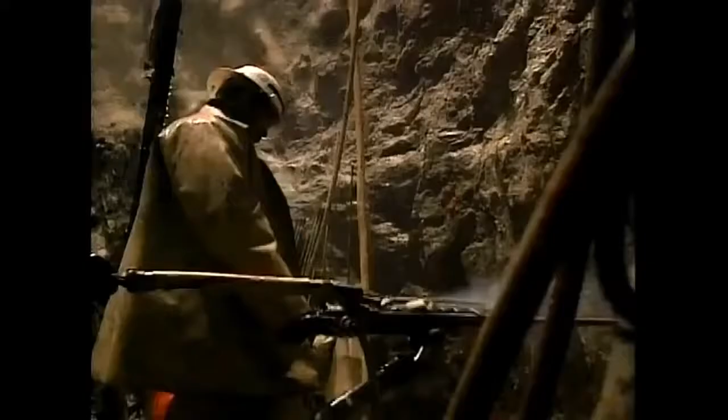To do this, miners will have to punch their way through some of the hardest rock on Earth. It will take the largest drilling machines on the planet, each more than 3 stories high and longer than 4 football fields, drilling 24 hours a day for 6 years to get the job done. The project is incredibly dangerous and outrageously expensive. The price tag: $7 billion.

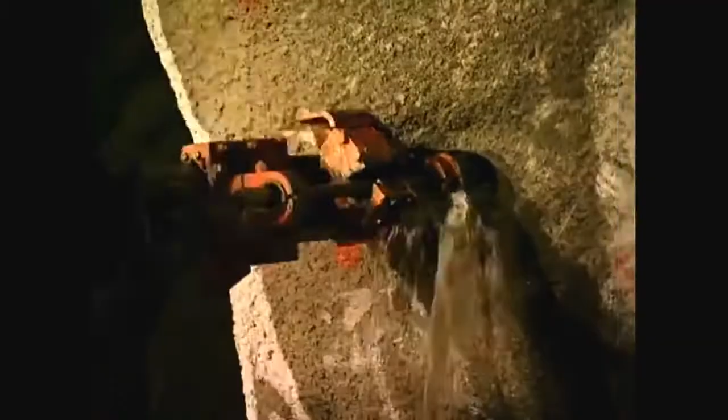Can it be done? Or will unforeseen problems bankrupt the project before it's finished? Will engineers be able to avoid the horrible fate of so many other tunnels? Fire, disaster, and death.

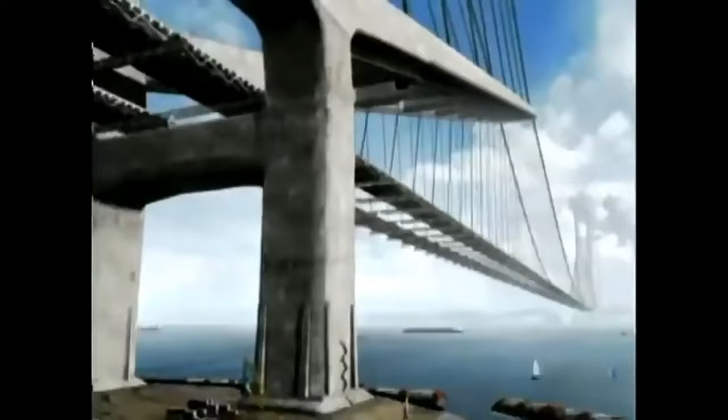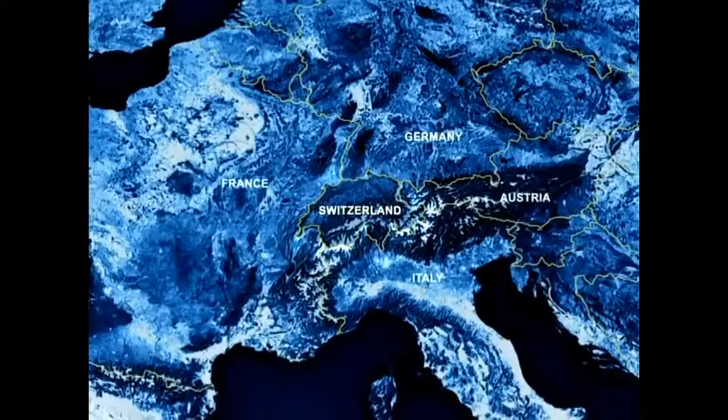To the outside world, Switzerland is a picture postcard. But the reality is not so pretty. Because of Switzerland's central location, each year 14 million trucks and cars coming from every corner of Europe pass through Switzerland on their way elsewhere. The sheer volume is fast turning this country into the biggest traffic jam in the world.

An obvious solution: put more freight and passengers onto trains to reduce the number of trucks and cars on the road. But it isn't that simple. The antiquated railway system is already jammed to capacity.

In 1998, Swiss voters decided that something had to be done. So they voted to authorize a whopping $21 billion for a mammoth project: a high-speed rail network to be built under the Alps, connecting Switzerland to the major cities of Europe.

The scale of the proposed project was staggering. It would require 2 separate tunnels, each one far longer than any mountain tunnel ever built. The shorter of the tunnels, named Lötschberg, would run for 21 miles under the mountains in southwest Switzerland. 50 miles to the east, an even longer tunnel would run 35 miles through the Alps. Since it would run directly under a mountain range named Gotthard, it would be called the Gotthard Tunnel.

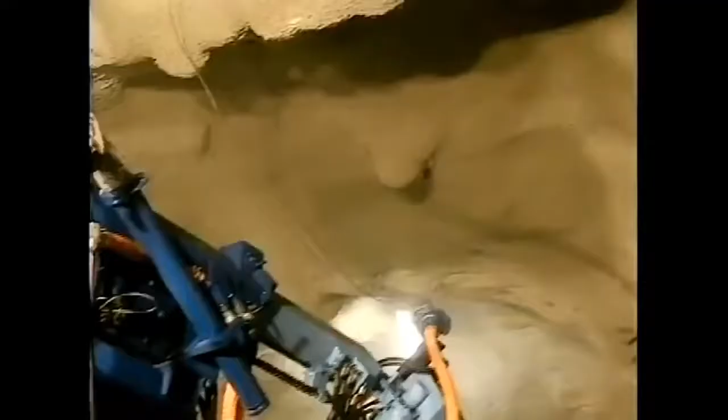So the contract approved by the voters put enormous pressure on the engineers and the contractors. First, there was the guarantee: the engineers would need to certify that the tunnel would last at least 100 years. That meant that literally every material used in the tunnel would need to be subjected to the most rigorous testing in history. But that wasn't all.

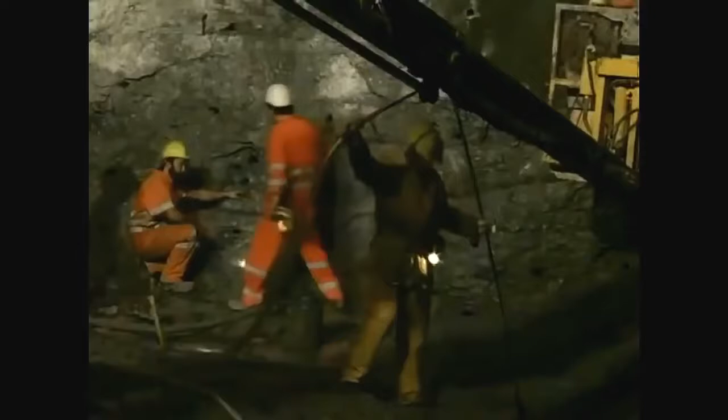The contract also called for the tunnel to be built fast. And if the builders made mistakes that put the project behind schedule or over budget, they would risk paying stiff financial penalties.

We're not allowed to forget cost and time scheduling. Those are very risky things. You just got to keep all of that in control. And everybody's really aware that the whole world is watching us, and we've got to get everything right.

Even without these added pressures, the Gotthard Tunnel project would still seem like an impossible task, just from the scale of the work itself. The miners will have to dig 24 million tons of rock out of the Alps, an amount that would fill over 16 football stadiums.

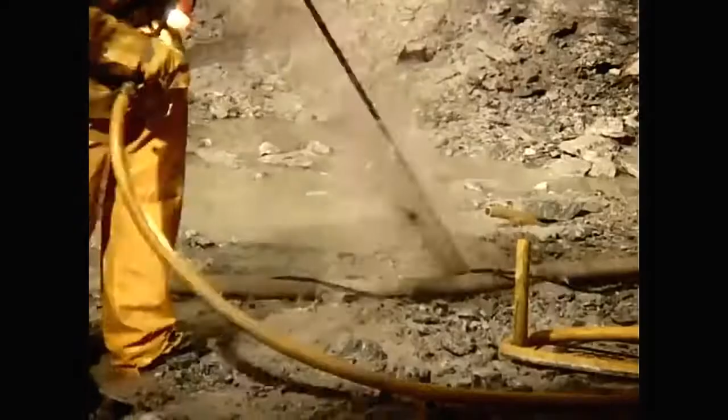Working conditions are extreme. Because the tunnel lies so deep underground, temperatures inside can reach 115 degrees. The miners work in near darkness and breathe thin, dusty air. Every day, they put their lives on the line.

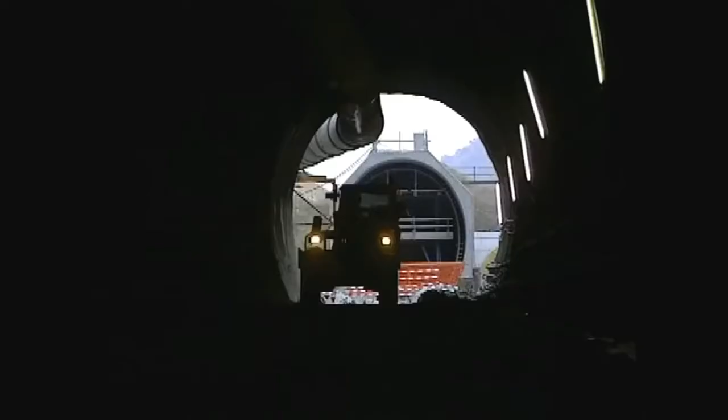The biggest danger is a lack of oxygen. In case of an emergency, fire, or explosion, the first thing that goes is the oxygen to breathe, because we're underground. We've got dumpers, we've got excavation machinery that move back and forwards. They're just moving around all the time.

It's dark. Drivers don't see people walking around behind, and if they reverse out, somebody could get hit by machinery.

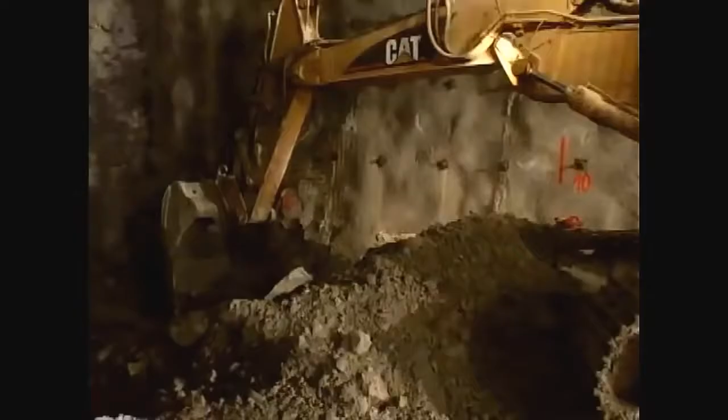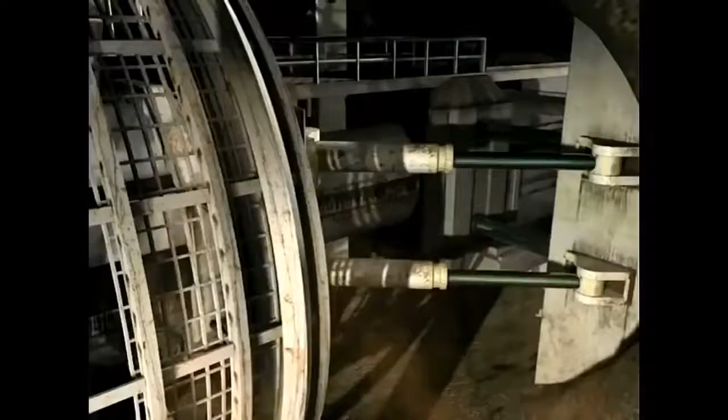And the dangers don't stop there. Tunneling is a battle between man and the earth itself. Cave-ins are a constant threat. To minimize the risk, geologists take samples deep inside the mountain before drilling begins, to find out what kind of rock the drillers might encounter. In a lot of sections we have rock like this, real hard, gneiss, granite, where we go through with a tunnel boring machine. The TBM designed for the Gotthard Tunnel can chew away at hard rock.

But if the miners encounter soft or unstable areas, they have to use a different method. The rock must be drilled and then blasted out.

And in areas with high-pressure water zones and crumbly rock, none of these methods can be used, and the danger increases exponentially.

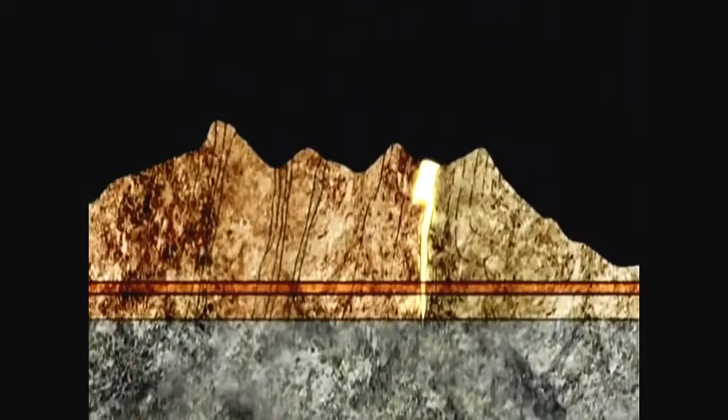In 1996, during initial surveys, geologists discovered such an area near the path of the proposed tunnel. The geological team taking core samples got hit by a sudden, powerful explosion of sand and water.

It's like you're in a submarine, 3,000 feet under sea level, and you drill outside into the sea. You hope the water doesn't come into the submarine. So it's really life dangerous.

Fortunately, no one was killed in the accident. But the incident threatened to stop the project in its tracks. Engineers estimated stabilizing the area would cost an extra $600 million. That money simply wasn't in the budget.

It took another half year of drilling deeper before geologists found a route that avoided the danger zone. And then we found a totally different rock, a marble. So this is not a difficult rock, so we can go through with the TBM.

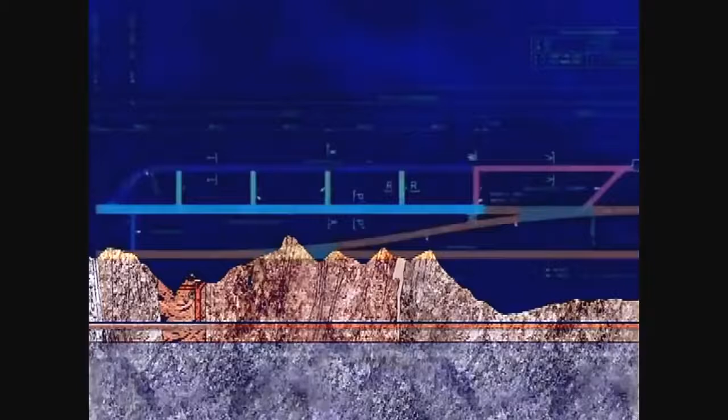Now that a safe path through the mountain had been determined, the design team could move on to their next big decision: what would the tunnels themselves look like? A single large tunnel with two sets of tracks inside would be the cheapest solution. But this design had a fatal flaw. If a train derailed inside the tunnel, it could hit an oncoming train or block the tunnel in both directions.

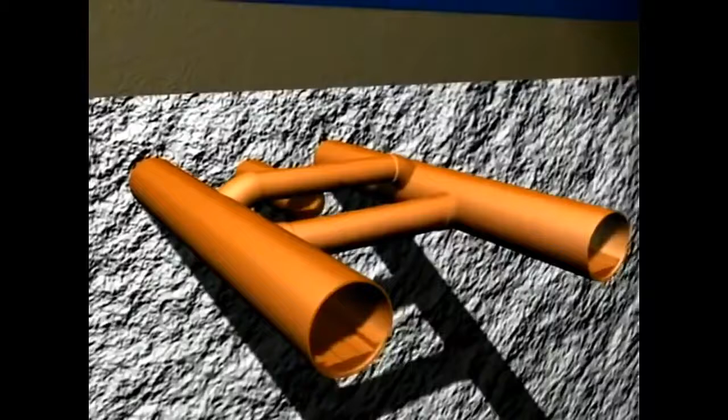A safer alternative would be the 3-tube system, like the one used in the Channel Tunnel between France and England. The Channel has two single tunnels, one for each direction, and a smaller central tunnel for emergencies.

That third tunnel proved a lifesaver on November 18, 1996. That evening, a train carrying several trucks entered the tunnel on the French side. The conductor was unaware that one of the trucks had somehow caught fire. At the time, there were six trains in the tunnel, including two passenger trains. Twelve miles inside, the conductor brought the burning train to a dead stop.

He tried to get the passengers out, but the smoke was so thick they could barely see the exits. Eventually they were able to make their way to the safety of the central emergency tunnel. They were very lucky—the fire was so intense in the tunnel they had left that it melted part of the concrete lining. Two people suffered serious smoke inhalation, but thanks to that central emergency tunnel, nobody died.

The lesson was clear: tunnels will always be dangerous places, but a good design can reduce the risks. You will never get a completely risk-free tunnel. You have to design it to cope with the foreseeable risks that might be faced. But at the end of the day, there are certain things called emergencies in which you have to have an emergency plan, whatever the situation.

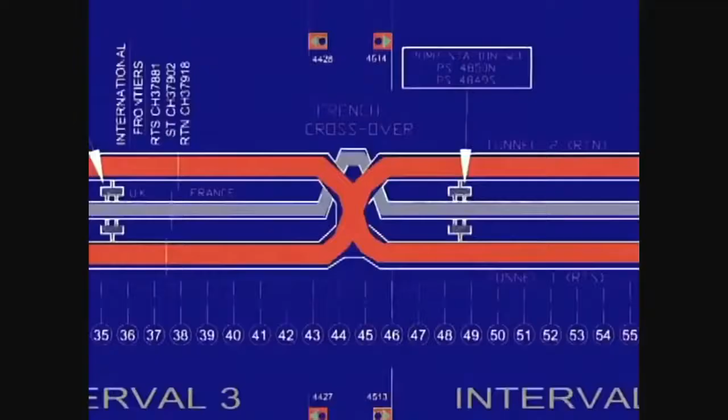The Swiss engineers carefully considered the pros and cons of each design. The single-tube system was clearly too dangerous, but the 3-tube system was far too expensive. So they came up with something else: a double-tube design, separate tunnels going north and south that would reduce the risk of a head-on collision.

To enhance safety, they added passageways every 1,000 feet, allowing emergency crews to move between both tubes. Two crossover points along the track would allow trains to switch from one tunnel to the other in an emergency. The designers added another crucial feature: a series of small passageways connected to an escape route that crosses to the other side. Each tube would have two of these emergency stations.

If a fire were ever detected, the computers in the command center would guide trains directly to the closest emergency station. Passengers would then evacuate the train and make their way to safety. A pair of massive ventilators at the portals would bring in fresh air and push out the smoke.

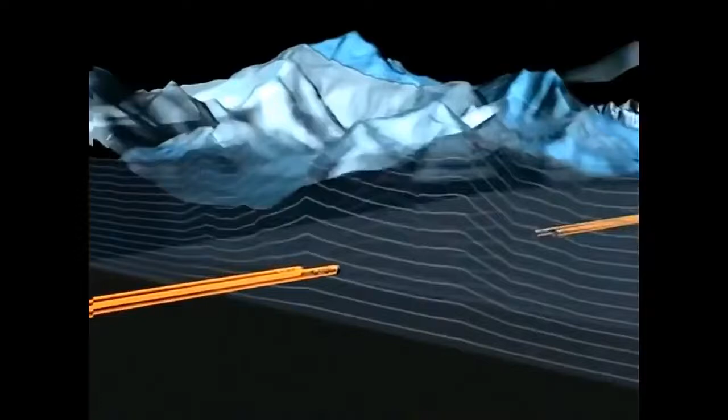Now the engineers had a workable design. Next, they needed to plot the tunnel's precise path. The plan called for massive tunnel boring machines to burrow in from the north and south. The trick is how to make sure they meet in the middle. If they miss by just 6 inches, tunnel workers will need to redig hundreds of feet of tunnel to get back on track.

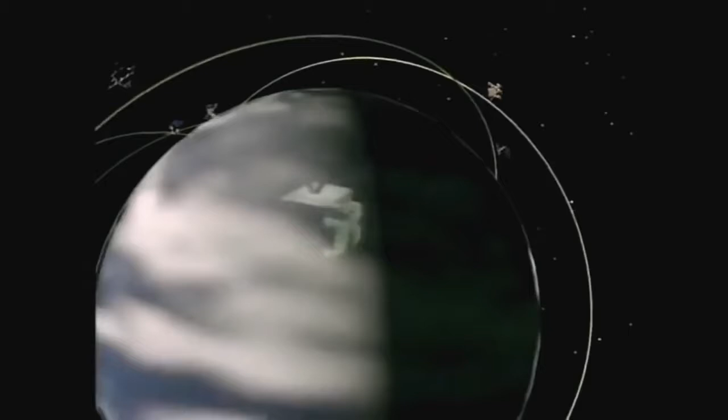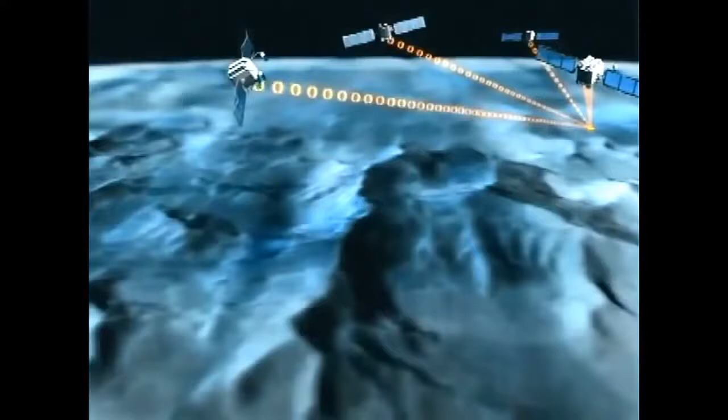So to make sure they had the most accurate mapping information, the engineers turned to the Global Positioning System, GPS. GPS receivers were placed at the north and south tunnel entrances, as well as 3 intermediate points along the proposed path of the tunnel. Next, 4 GPS satellites in geosynchronous orbit above the Earth beamed signals to the receivers, which gave them their precise coordinates: latitude, longitude, and altitude. Once the engineers had these coordinates, all they needed to do was connect the dots.

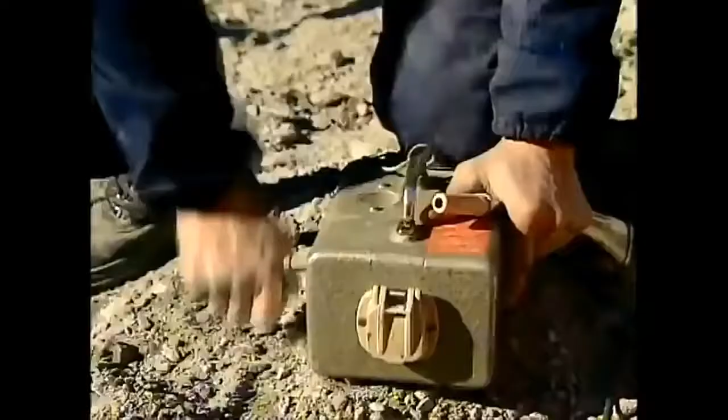The plans were complete. Now the real work could begin. Base camps were set up to launch the attack on the mountain. Because the job is so enormous, the engineers plan to enter the mountain from 5 distinct starting points.

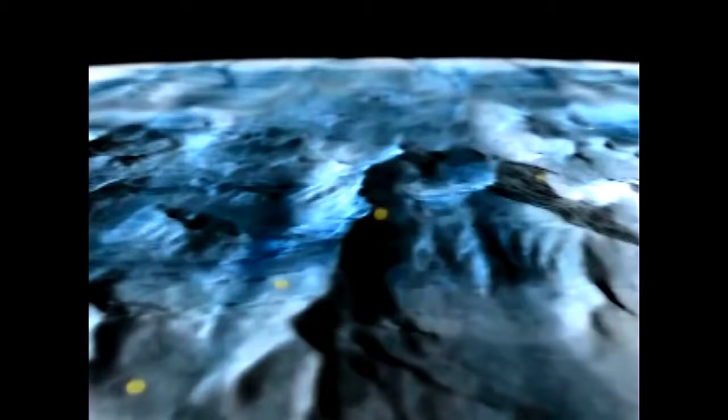It's a new system, a new way to excavate such a long tunnel. It would have taken us about 20 years to meet up because it's so long. With these measures of attacking with 3 intermediate attacks, we've sped up the whole excavation phase by about 6 to 10 years.

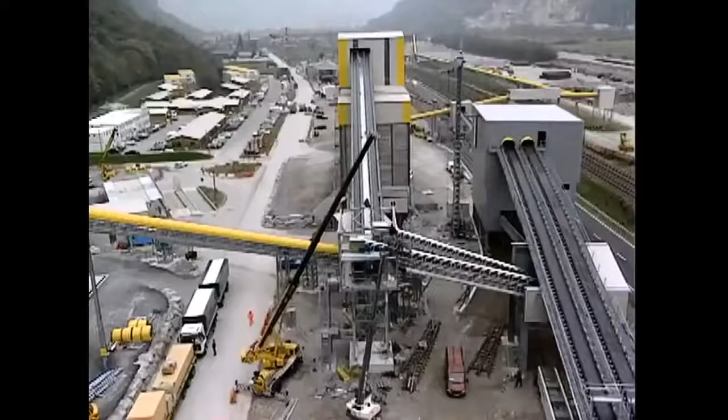Each starting point would have its own base camp, complete with concrete factory, water treatment center, living quarters for workers, cafeteria, even a mass transit system. The base camps would play a crucial role in keeping environmental damage to a minimum.

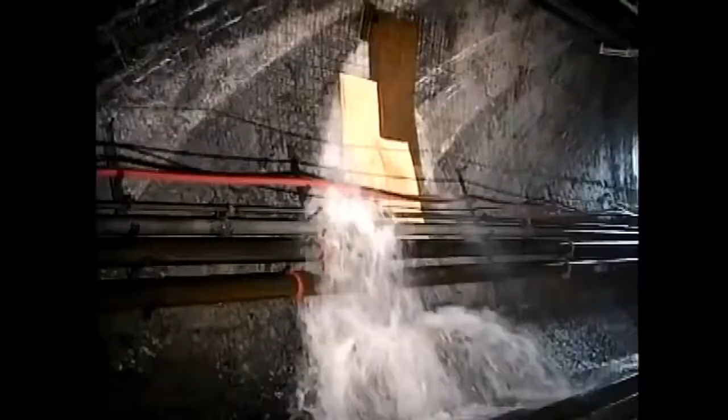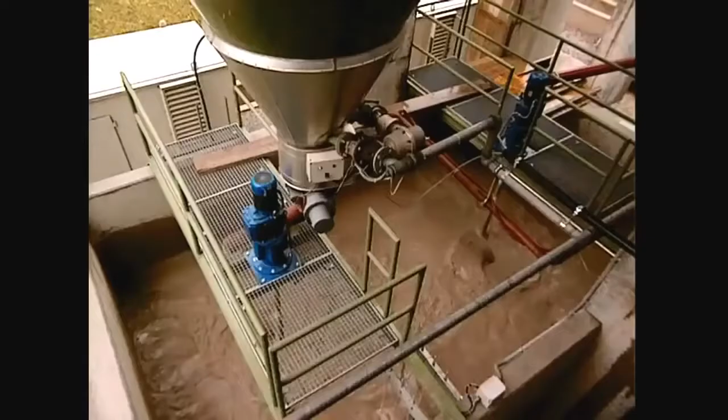A major concern was water. Drilling would contaminate huge quantities of pure mountain water that had been locked inside the mountain for millions of years. Water treatment plants at each base camp would filter out contaminants and then channel the water to nearby rivers.

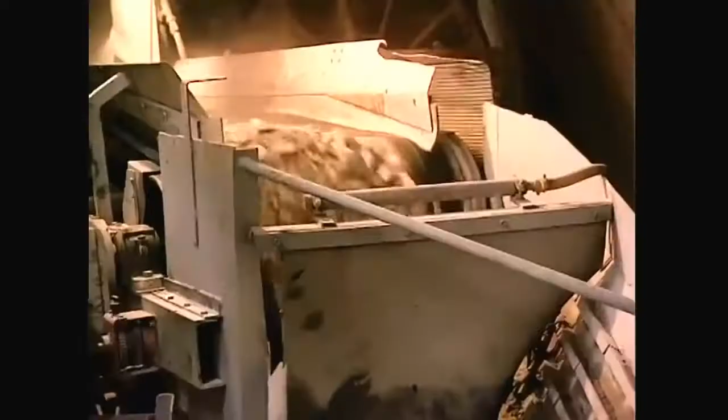But an even greater concern: rock debris. What could be done with the 24 million tons of rock the miners would carve out of the mountain? They came up with an ingenious plan: recycle it back into the project.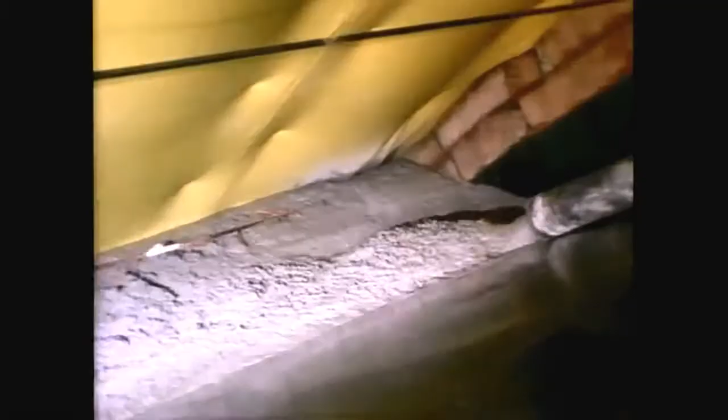Concrete factories at each site would transform the rock to produce the 7.5 million tons of concrete needed to line the tunnel walls. That's enough concrete to pave an 8-lane highway 300 miles long.

Once the facilities were in place, project managers could start bringing in manpower. 1,800 workers were brought in from all over the world, among them the world's best technicians, explosive experts, and heavy machine operators. With the army in place, the full-scale attack on the mountain could begin.

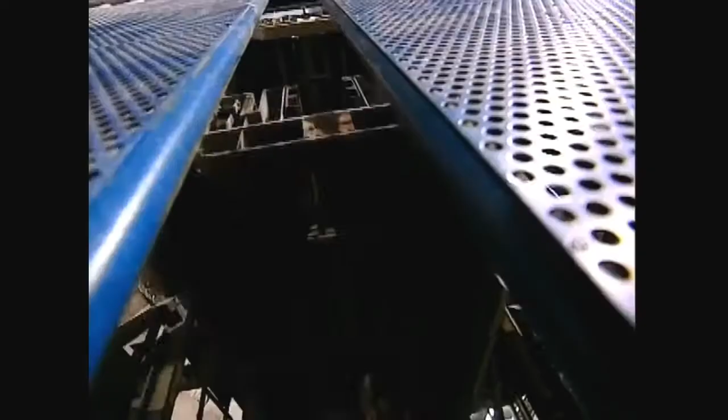Their first task: build access tunnels into the rock. These tunnels are needed to get the workers and equipment to the actual work site deep inside the mountain. The workers would enter the rock in trains, buses, even an elevator. The schedule required work to go on around the clock, 7 days a week, for 12 years.

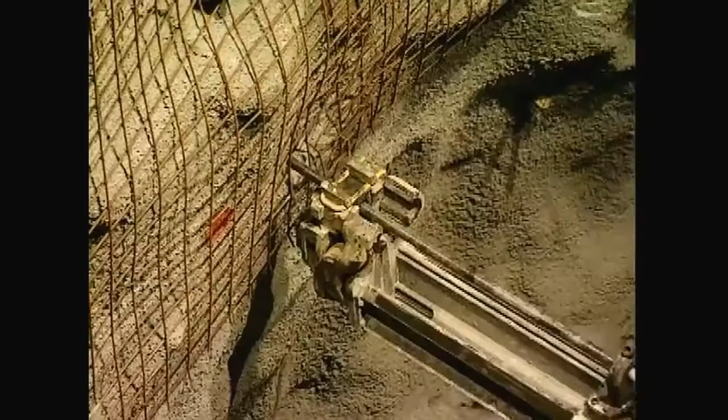Drilling, digging, blasting, just to make the deadline.

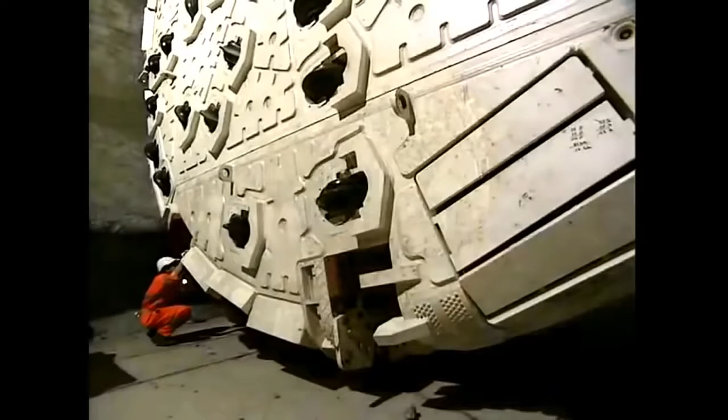But even at that pace, the project would be completely impossible without this. This is one of the biggest tunnel boring machines in the world. It's a drill with a drill bit 30 feet in diameter, designed to bore a tunnel through some of the hardest rock in the world. How big is it? 3 stories high, 4 football fields long.

At full throttle, it can advance through 130 feet of solid rock in a day. But even this gargantuan machine had never been tested under these conditions. Could it withstand 6 years of constant grinding?

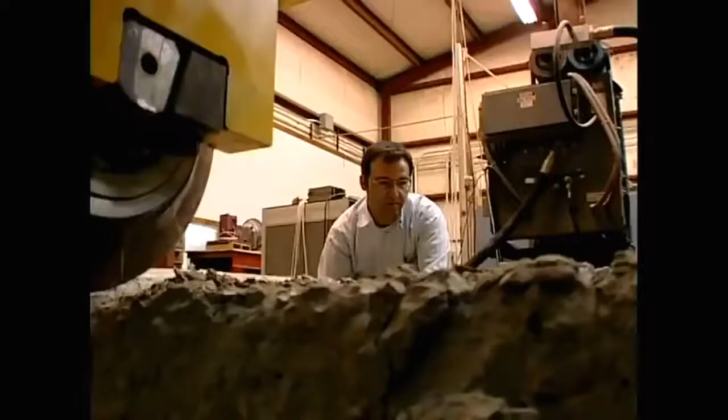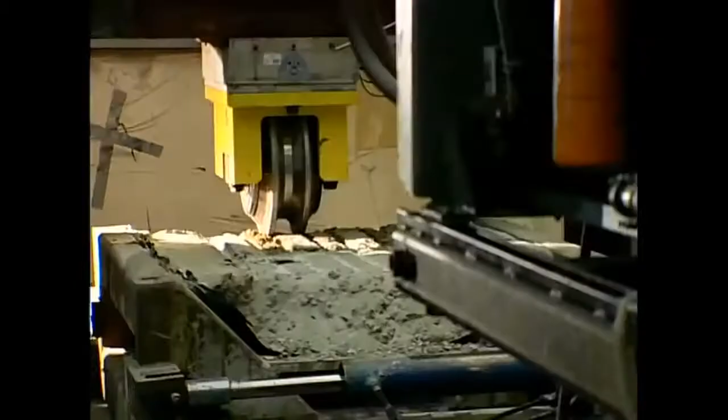To improve the odds, the engineers had to arm the machine with the best possible weaponry, custom made for the job. The best custom drill bits for tunnel machines are designed here at the Colorado School of Mines. Looks like you are getting some overbreak over here. Where researchers test individual cutters, the steel alloy rollers that actually grind the rock face.

To guarantee each cutter is best suited for its job, a rock sample from the tunnel site is placed on this machine. A cutter rolls over the rock again and again. The machine measures the force needed to cut through this rock.

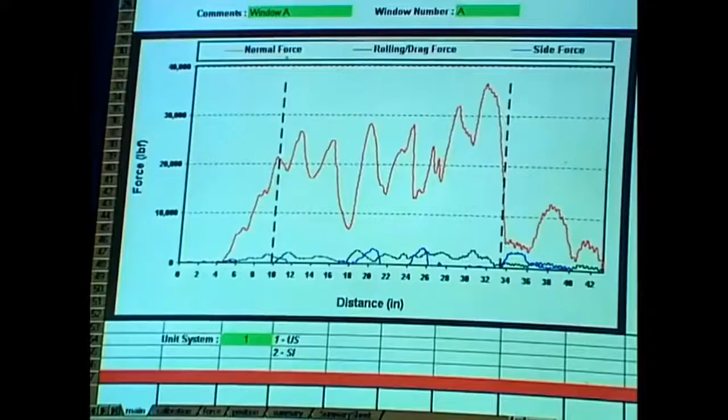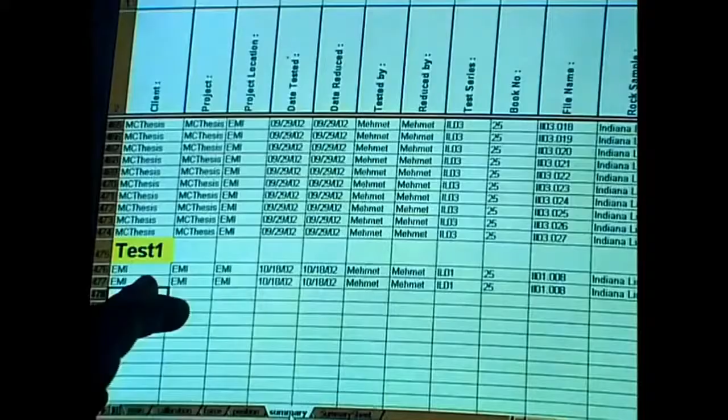The data we get from these tests allows us to design cutter heads that'll best match the tunnel boring machine to the rock being bored through, making the machine as productive and fast as it can be. The testing is critical. If the cutters are not made right, they could wear prematurely and slow the project down.

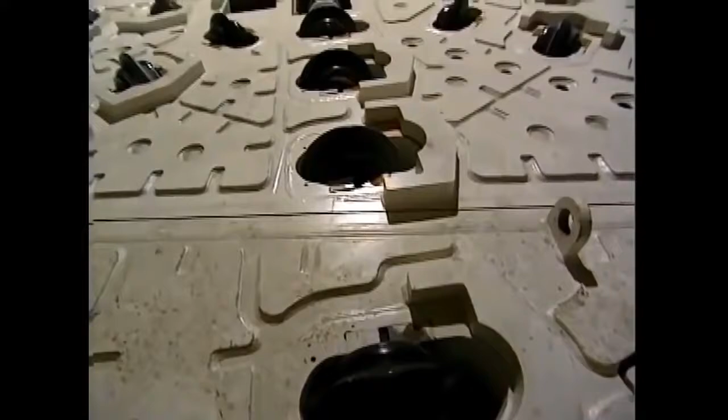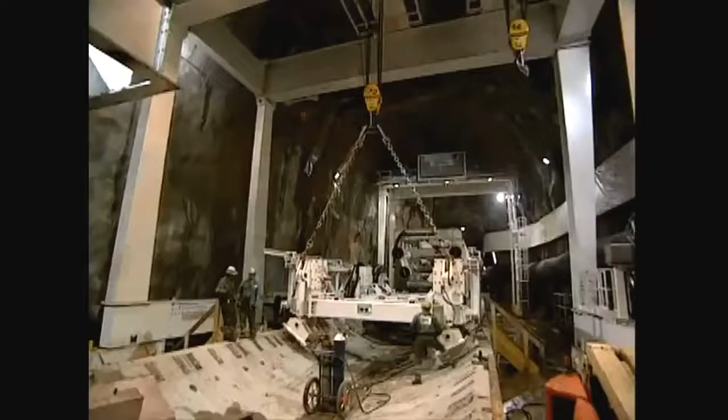58 of these cutters, each 17 inches in diameter, are mounted to the front of the boring machine's cutter head. The custom-designed cutter head was made in Germany and then shipped to the tunnel site back in Switzerland. It then took 3 more months for technicians to attach the cutter head to the machine. Meanwhile, the clock kept ticking.

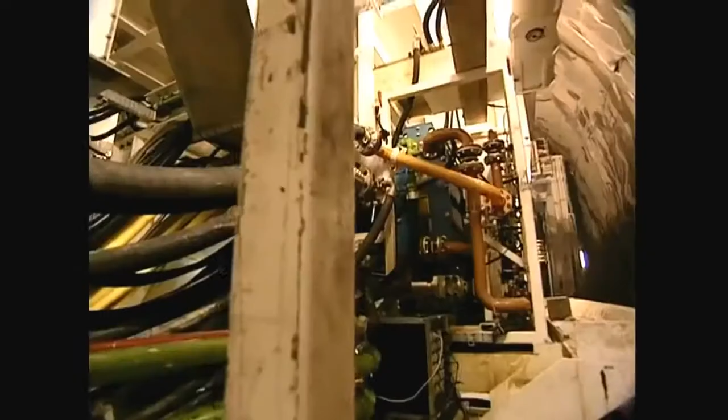In November 2002, the cutters finally had a chance to test their chops. It was a critical moment. Engineers, miners, and politicians gathered in the depths of the Alps to see if the giant would really work. They waited.

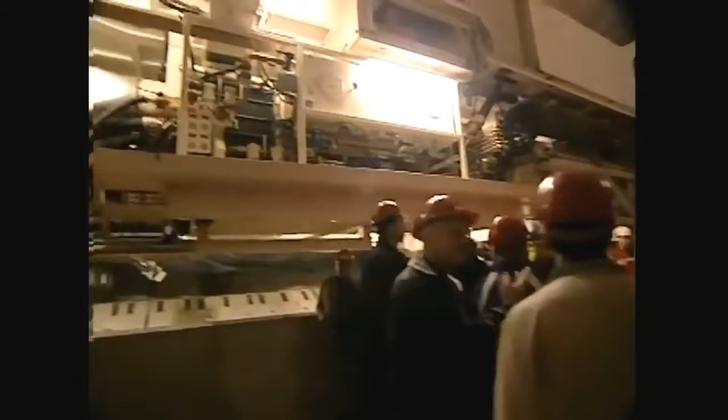Suddenly, the beast came alive. Its 3,500 kilowatt engine cranking out 4,700 horsepower. The massive cutter head turning, pulverizing the granite into tiny bits. Everyone breathed a gigantic sigh of relief.

Of course, the cutter head doesn't do the job alone. The Gotthard's tunnel boring machine is a complex marvel made up of 90,000 parts. Aimed precisely in the direction of the tunnel to be, a pair of gripper pads is pressed against the rock, locking the boring machine in place. The powerful hydraulic arms attached to the gripper pads push the cutter head forward, driving it into the rock.

The cutter head turns counterclockwise, crushing the rock into small chips with its 58 cutters. Each cutter can exert 26 tons of force. That's like 58 cars simultaneously hitting a rock wall at 26 miles per hour.

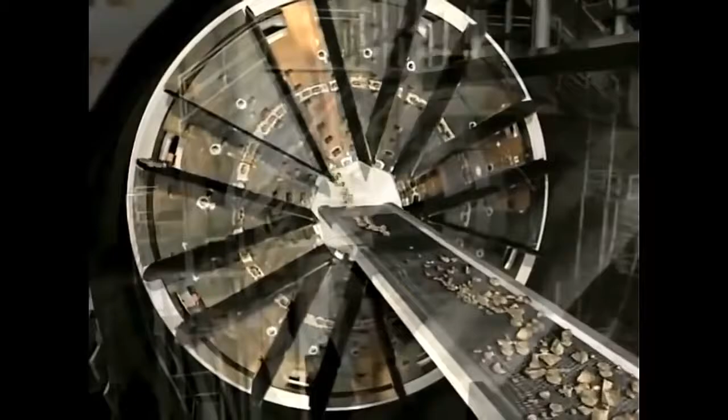As the cutter head grinds, the small chips fall into a set of rotating buckets. The buckets deposit the chips onto a conveyor belt, which shuttles them out of the tunnel and onto the concrete processing plant.

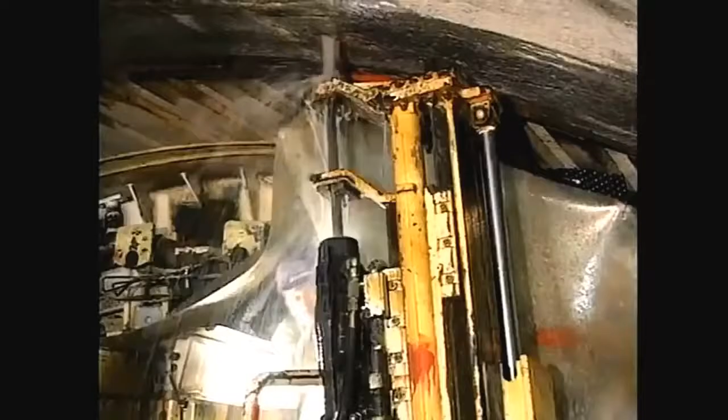But the tunnel boring machine does a lot more than grind the rock. Directly behind the cutter head, a set of robotic drills punches holes in the tunnel wall for bolt anchors to keep loose rock from falling in.

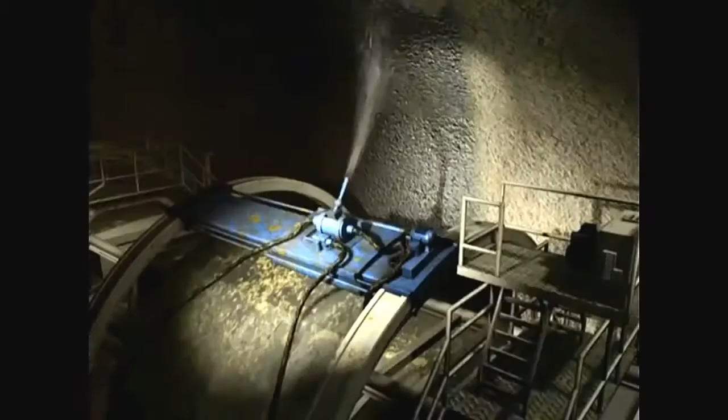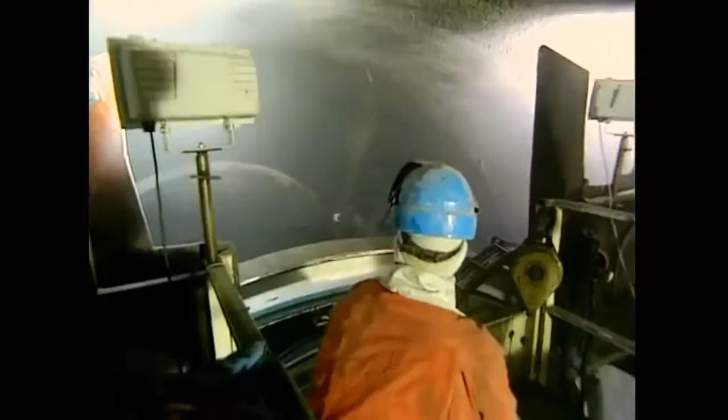65 yards behind the cutter head, a robotic arm sprays every square foot of new wall with a liquefied concrete called shotcrete. In a matter of seconds, the shotcrete dries, hardens, and binds to the tunnel walls. It provides a tough inner skin, which is added insurance against cave-ins. After every 7-foot advance, the workers must stop to reposition the grippers, and the process starts all over again.

The project is so massive and the schedule so tight, the job requires not one, but 6 of these $21 million tunnel boring machines. One pair bores north from the south entrance, while a second pair grinds south from a midway point. Then, a third pair of machines will start at the north entrance and drill south toward the midway point. If all goes as planned, the big machines will finish their part of the job in June 2009.

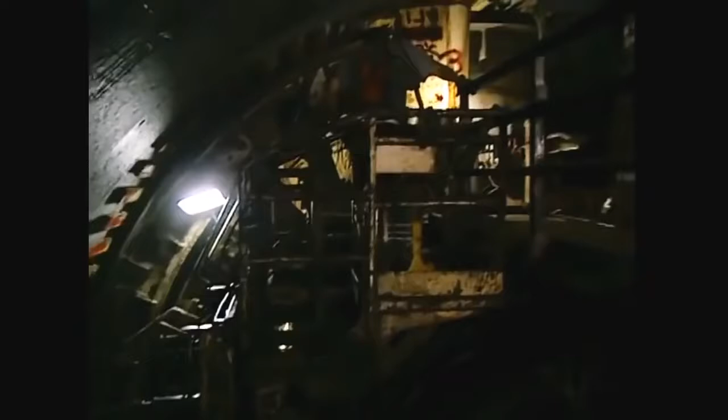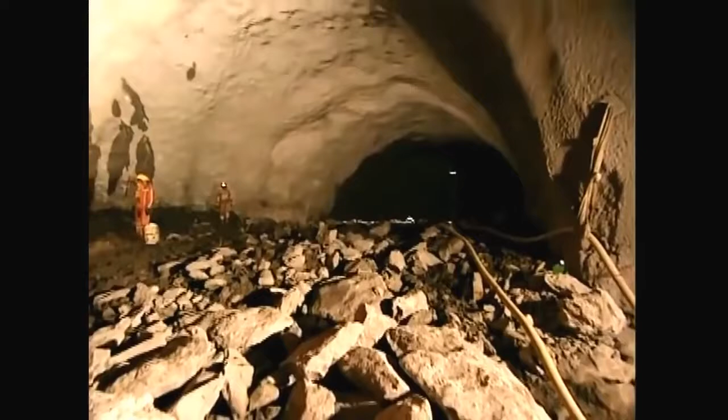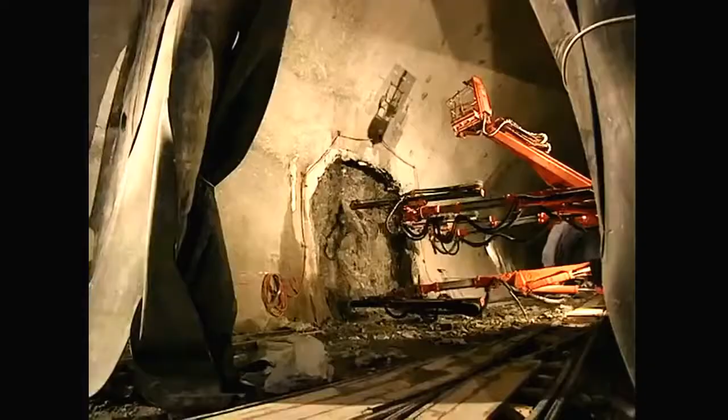But there are plenty of unknowns. And as powerful as the boring machines are, there are some places in the tunnel where they can't be used. That's because these machines can dig only straight and only through hard rock. But the Gotthard Tunnel will pass through a few areas where the rock turns soft or is broken and unstable. The risk of a cave-in is simply too high in these spots to use the machine. So they have to be dug out the old-fashioned way, by drilling and blasting.

This machine is called the rocket boomer. It's a huge rock drill, capable of choreographing an explosion so potent it can remove a perfect circle of rock up to 19 feet thick. First, a technician uses a laser beam to align the drill.

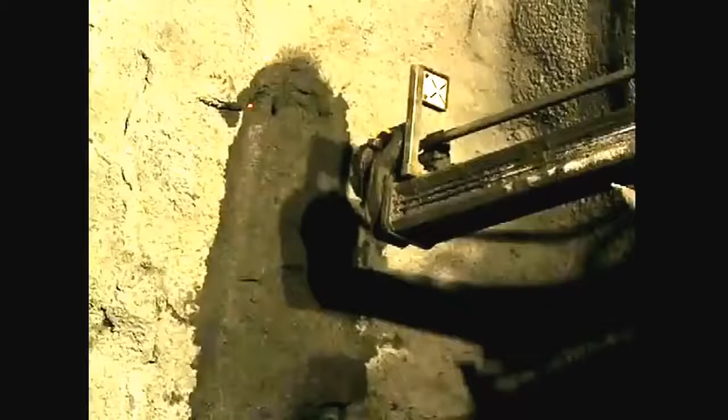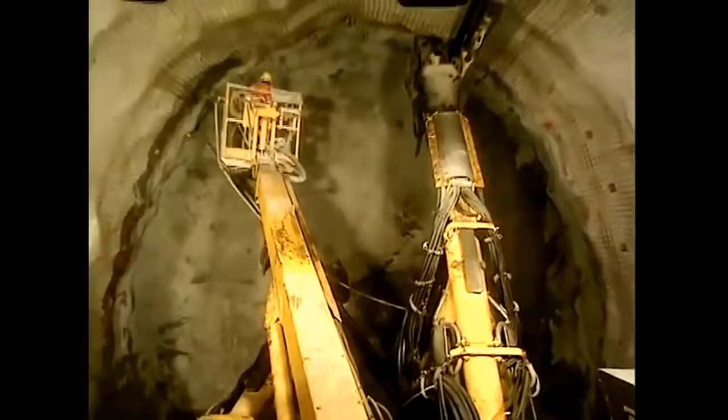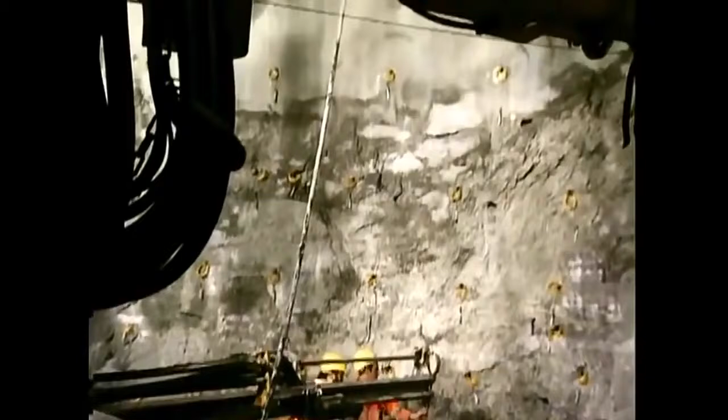Next, the rocket boomer's computer calculates the blast pattern that will deliver the most bang for the buck. Then the drilling begins, over 80 holes, up to 19 feet into the rock. Into these holes, a technician pumps precisely measured doses of 2 different chemicals. Each chemical on its own is completely harmless. But if the recipe is right, together they will become a volatile cocktail.

To ignite the explosion, the technicians insert an electrical detonator into each hole. With all the leads linked together, a jolt of electricity sets off a massive blast.

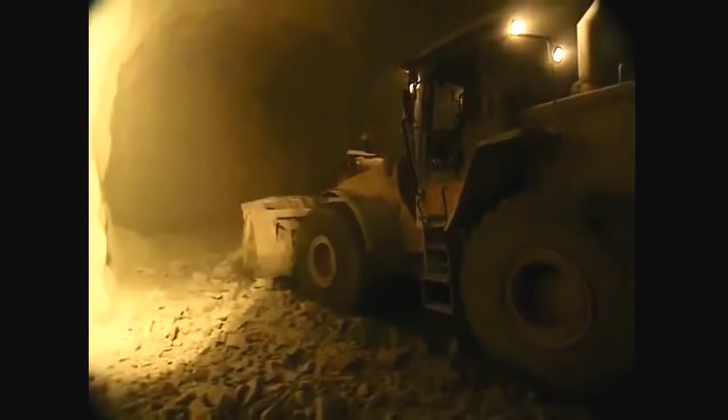Once the dust settles, the rubble is shoveled out. A single blast like this takes 8 hours to pull off. Their workday done, the blast team now makes way for the next shift, who will prepare the next blast.

Each day, on every front, the workers fight to advance into the rock as far as they can. The drilling team leads the way. They're backed up by a second unit, following closely on their heels, performing another crucial part of the job: building the concrete lining of the tunnel.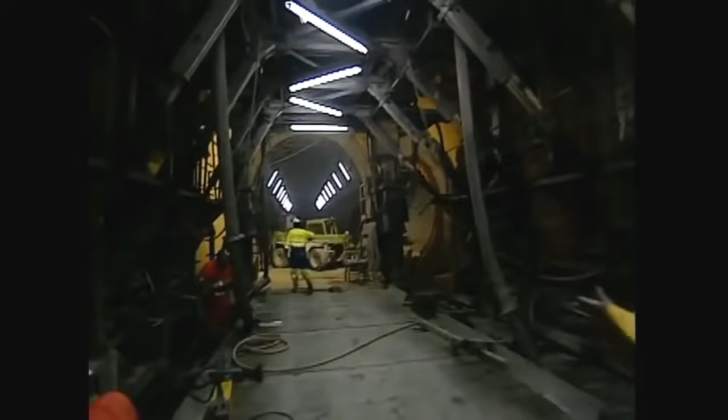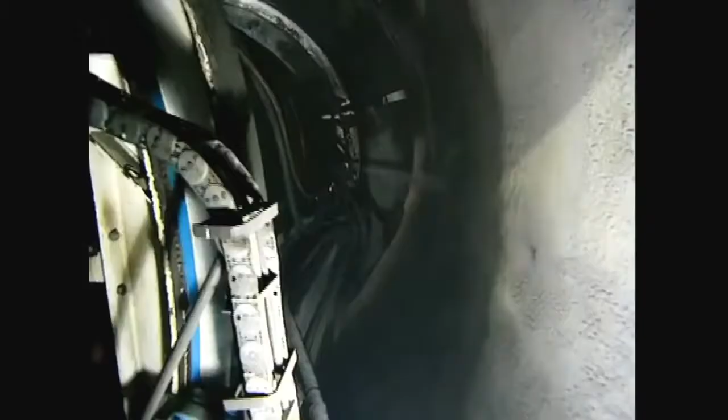50 miles west of the Gotthard, the drilling team working on the 21-mile-long Lötschberg Tunnel has almost completed the digging phase of the project. They've also already sprayed the tunnel walls with a layer of shotcrete, the liquefied concrete that stabilizes the rock as it dries.

Now, the tunnel is almost ready for its final concrete lining. First, it must be carefully prepared. At this stage, water is the enemy. Groundwater is always seeping through the rock and must be drained away. If not, water pressure can build up and literally push in the concrete lining of the tunnel.

To prevent this, the team applies an ingenious system of layering to the shotcrete wall. The first layer is a white plastic webbed mesh. The water trickles down the mesh into a drainage system at the bottom of the tunnel. A second layer of solid plastic sheeting seals off any remaining water behind it. This should make the inside of the tunnel waterproof.

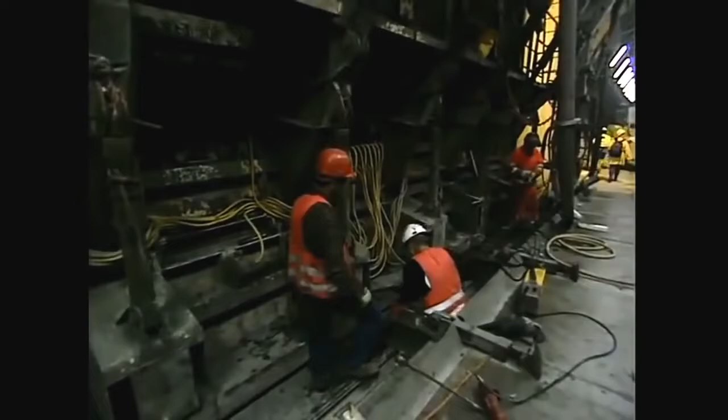Next, huge metal forms are put into place. And then, concrete is injected behind them. As the concrete dries, engineers keep water running over its surface so it won't crack. When the metal forms are removed, the smooth, final concrete lining is left behind.

Of course, the concrete used in these tunnels is no ordinary concrete. The designers have guaranteed that the tunnels will last at least a century. So everything that goes into the tunnel has been put through the most rigorous testing in the industry.

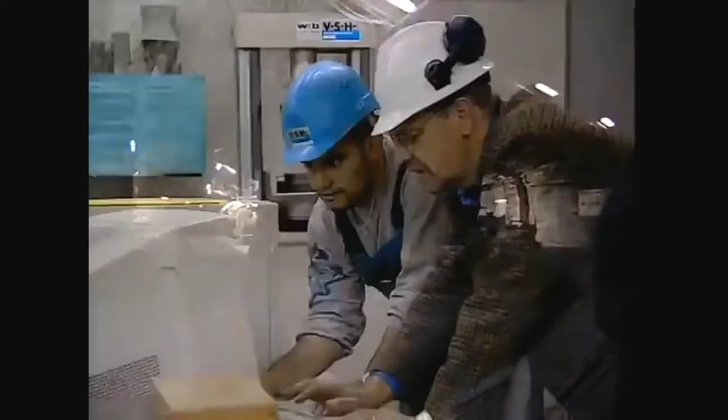And that's done here, at the most advanced tunnel testing facility in the world, the Hagerbach Test Tunnel, 40 miles northeast of the Gotthard. The Hagerbach test site is a labyrinth of tunnels crisscrossing and stretching 2.5 miles into the mountain. Here, engineers must test and approve everything used inside the Swiss Alp Tunnel project.

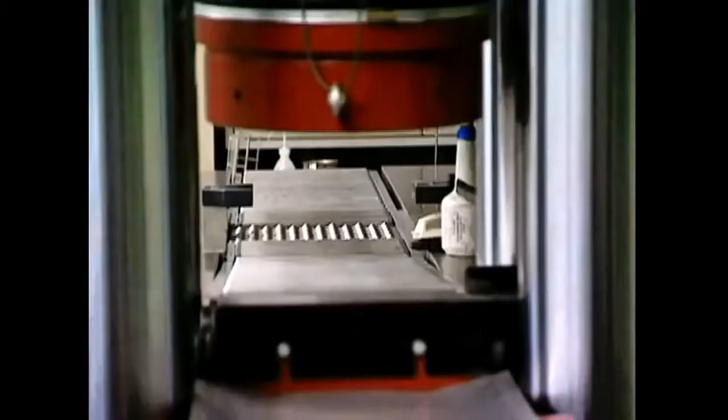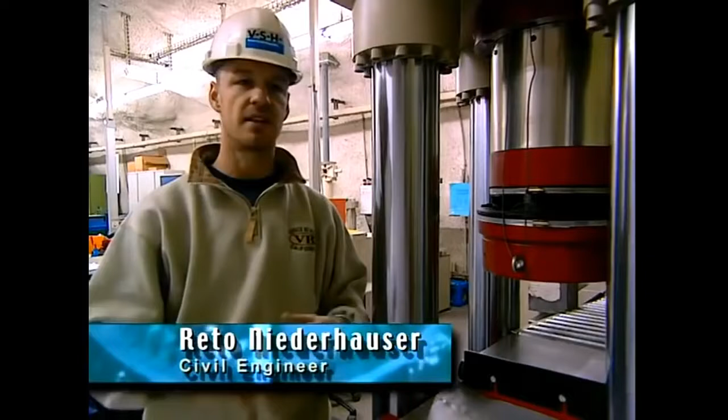In this laboratory, engineers subject concrete blocks to extreme pressure. The concrete lining has to hold up under the mountain's weight as the rock settles. When the deformation and the forces is too high in such a tunnel, then you have some cracks in the lining, or the worst case is that the lining can break down.

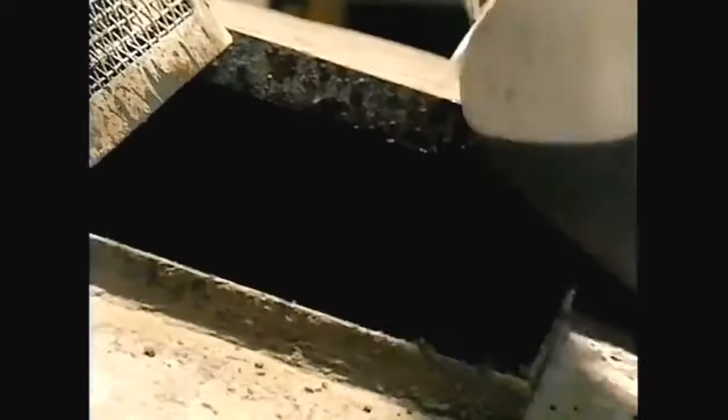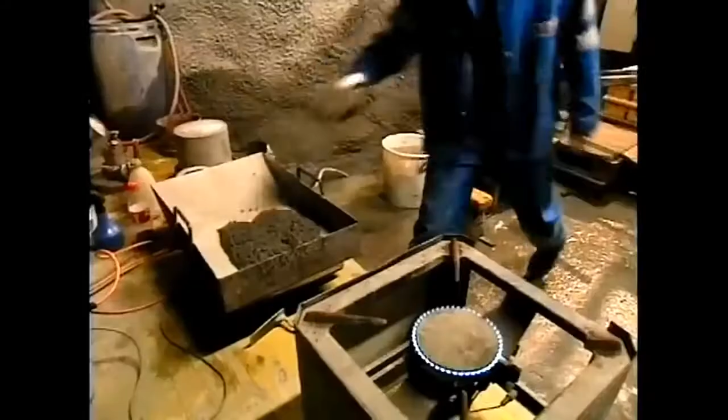Here, engineers are fine-tuning a shotcrete recipe: a mix of sand, gravel, water, and cement that is sprayed onto the tunnel's bare rock walls. The precise ratio of ingredients is crucial. Too little water, the shotcrete will be too thick to spray. Too much water, it will be too weak. Shotcrete also must be able to withstand extreme hot and cold temperatures.

In this area, engineers are testing explosives. Different types of rock need different formulas. Because the Gotthard Tunnel has extremely hard rock, they need an explosive with a lot of kick.

These tunnels are also used to test people, to prepare them for disaster. Fire is one of the biggest dangers in a tunnel. Using wooden crates and gasoline, the engineers simulate a common tunnel accident scenario: a truck on fire. In just a few minutes, the fire is a raging inferno.

In a fire, a tunnel acts just like an oven. Temperatures can exceed 2,000 degrees Fahrenheit, hot enough to vaporize human flesh, even concrete. So firefighters have to be trained to move fast, to knock down any blaze.

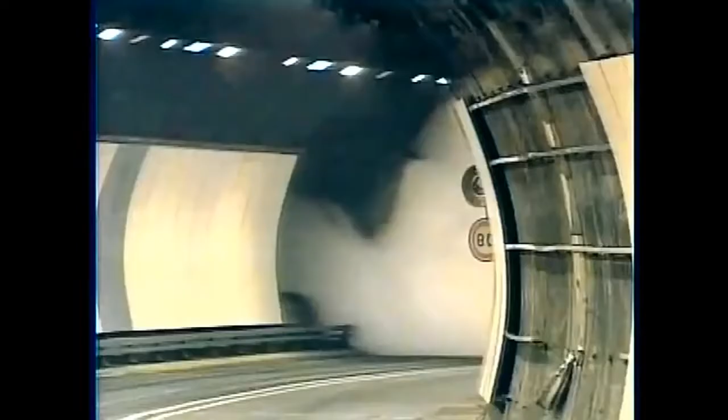About 4 miles into the tunnel on the French side, a truck driver noticed smoke pouring from the back of his rig. He pulled over, but within seconds, his truck was completely consumed in flames.

Unfortunately, the ventilation system was no match for the smoke. It was so thick, it took emergency crews an entire day just to reach the blaze. The fire burned for days. When it was all over, 39 people were dead.

Temperatures inside the tunnel had reached 2,300 degrees, melting sections of the concrete lining. The disaster forced a major redesign of the tunnel's emergency systems.

Learning from previous accidents or incidents is absolutely vital. It is one way that you understand how incidents occur, why they occur, how they develop, how people reacted to the incident in any one case, what worked well and what didn't work well.

In this case, the lessons were learned the hard way. So engineers were determined to get things right the next time around.

First, they added 76 high-powered fans to blow out smoke and bring in fresh air. They set up fire stations inside the tunnel so crews can get to the fire quicker. Now, heat sensors at each entrance scan all trucks for overheated engines.

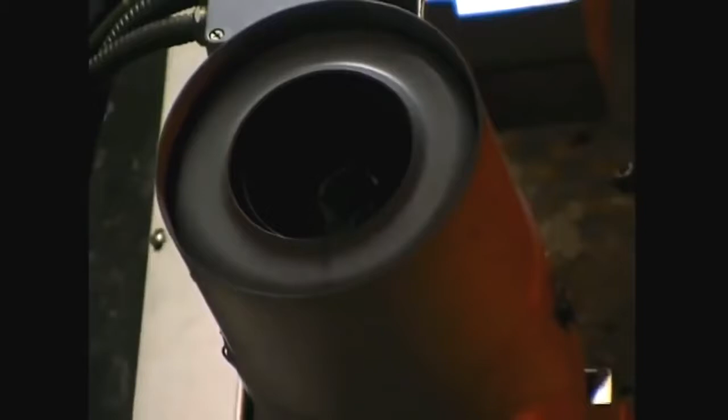120 cameras linked to command control centers monitor traffic around the clock. The number of emergency shelters was doubled. There are now 37, placed every 1,000 feet, running the full length of the Mont Blanc tunnel. Every shelter has a direct phone line to the central control room.

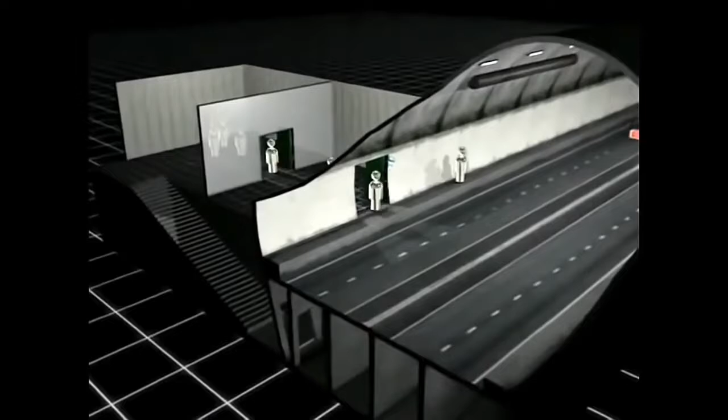And the engineers added something new, a way out of the tunnel. Inside each shelter, a stairway leads to a passageway below the main tunnel. In a disaster, emergency crews would be waiting there to take the drivers out.

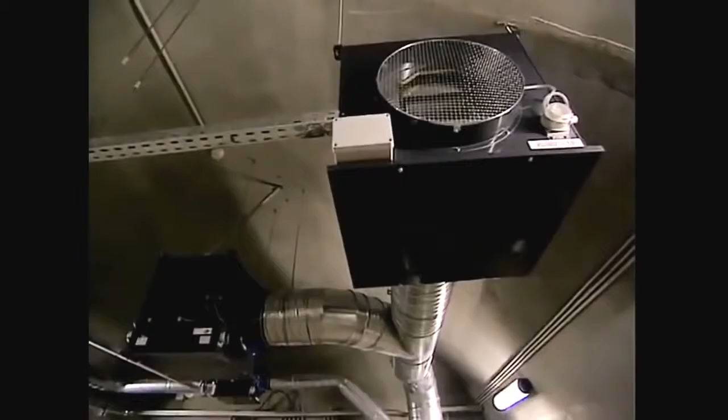The redesigned Mont Blanc tunnel is considered one of the safest in the world. But even with all the new features, there will always be a risk. No tunnel is 100% safe.

Fires occur in tunnels simply because there is flammable material and sources of ignition. And you will never eliminate those completely.

The risk of a fire haunts the designers of the new Gotthard Tunnel. Some freight traveling through it will be lethal. Volatile fuels and chemicals that could catch on fire, or even worse, explode.

The year is 2015. The new high-speed rail through the Gotthard Tunnel is a huge success. Just as the designers had predicted, the roads now run free of traffic jams. But today, things could change.

A small fire has just erupted on a freight train also carrying passengers. No one on board sees the fire. And the train is carrying a dangerous cargo of highly flammable fuel.

12 miles inside the tunnel, a passenger suddenly notices the smoke and alerts the conductor. The train's only hope: make it to an emergency station.